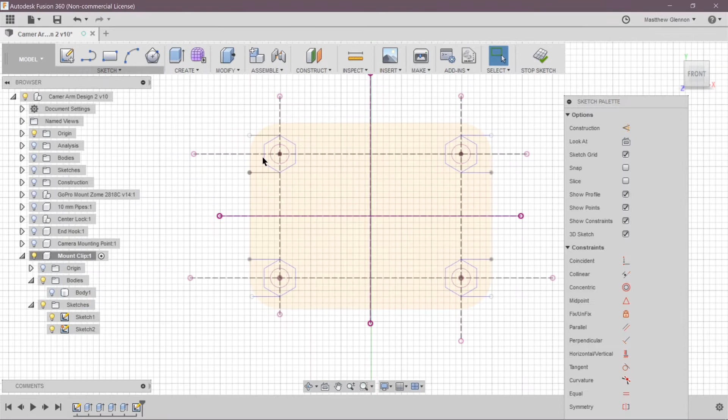Now the next challenge for this project. So far we had the challenge of getting the hook compression thing to work right with the rods. Now the next challenge is designing the hook or clip that will work well with the...

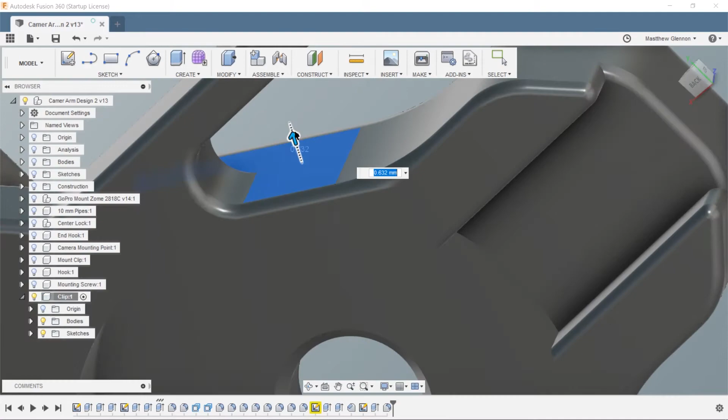So I'm going to make a few tests on the rods themselves, since we've already drilled the holes. By the way, I didn't drill them quite right. I've got a little bend in the rods, so that's part of life, I guess. That's why I'm having a tough time getting the screws on and off for this component.

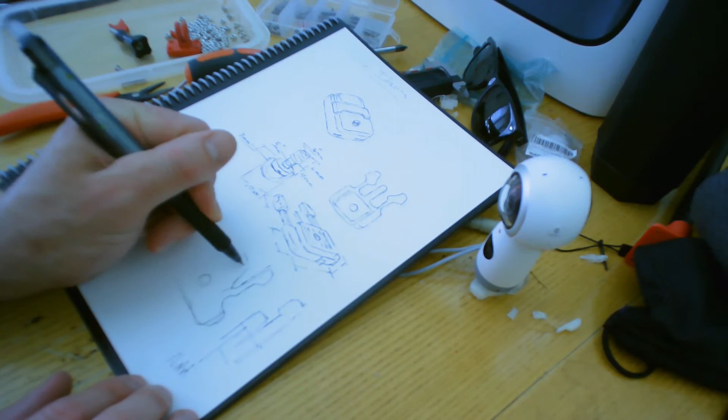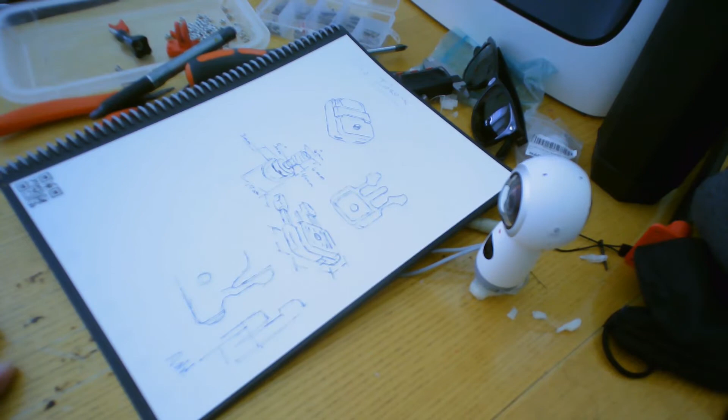Well, back to the drawing board. This kind of failed, and I'm not happy with it. I think if I were to do straight lines like that in the future, I'd have to make quite a few adjustments where the thickness of the walls may need to be thinner or things of that nature.

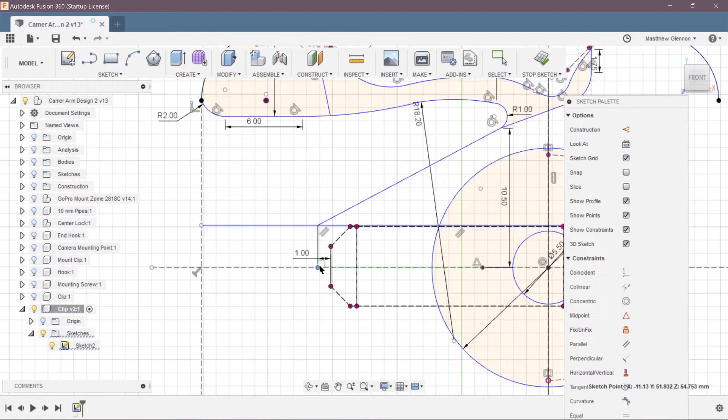I just was not happy with the design overall. I don't feel that it was going to work properly for our needs here. So we're going to redesign everything, and we're going to approach it with this curved design, which I think works better, and I feel it looks better in addition to that, aside all that.

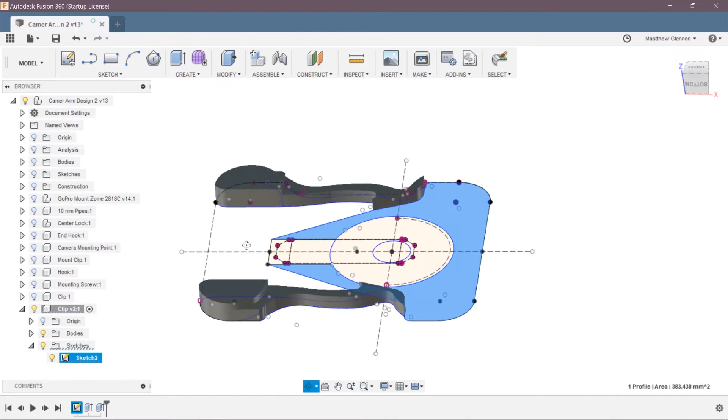There are other problems with the original design. One is the quarter screw hole was too big. Now it's a little bit on the tight side, but it works. At least the screw stays in.

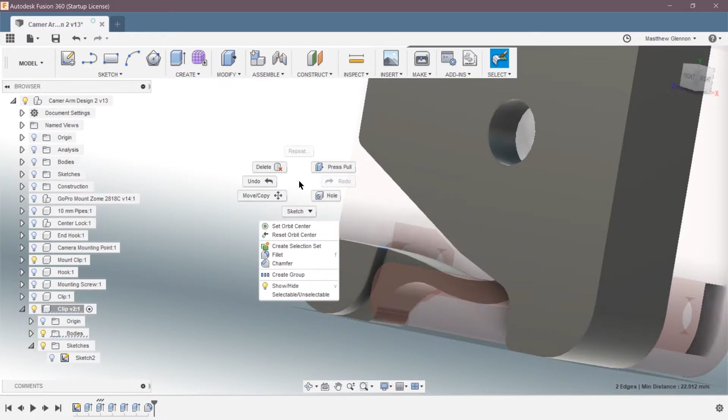The other problem here was the thickness of between the base and the top. There wasn't enough material there. I needed to have over 3 millimeters of material between the base of the screw and the start of the threads to fill in that gap to guarantee the cameras will hold in position.

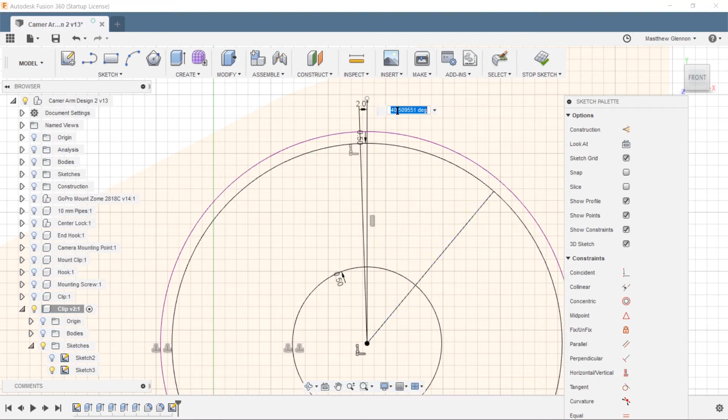You'll see me working on there. In addition, I made a few little bevels on the top going around the hole to help hold the camera in place.

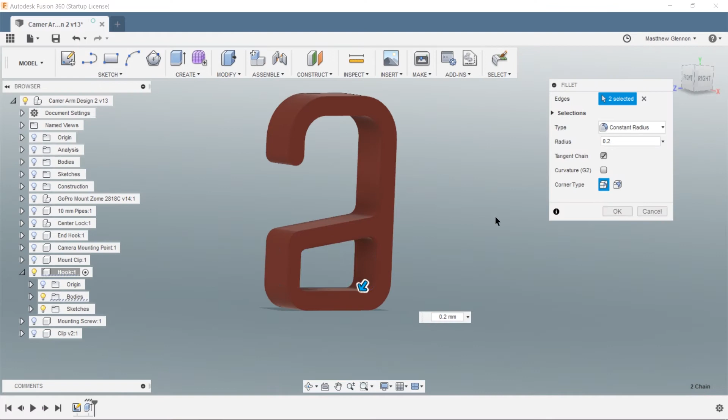Cleaning it out, getting all the bits and pieces, getting all the nuts in, getting everything screwed together, and hoping that this literally will be the final end result of it. Which, by the way, spoiler, it is, which I'm happy about. So as I work on this piece, you can see me testing the new clip out, which looks and works great. So I'm happy with that. And towards the end of this video, I will put some images of the final product and everything completed.

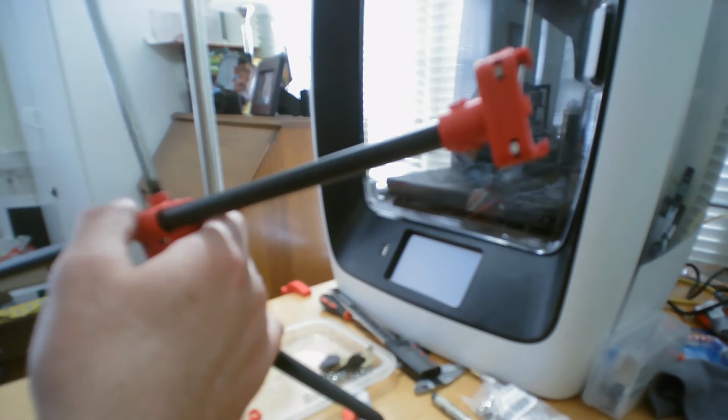Trying it out, seeing how the angle is. Well, this angle I don't think's perfect, but it is far better than what we were doing before, where I had the camera propped up on the edge of a book or a box or something, or whatever I could find to lift the camera up as high as possible. This, at least, it's going directly over me, or over my hands anyways, and there's enough space for me to see, and there's plenty of room for adjustments.

There's a few things I'd like to add maybe in the future, where I can have a little bit of a pivot on the mount, but for now this is good, and I think this will help you guys see a better picture of what I am doing.

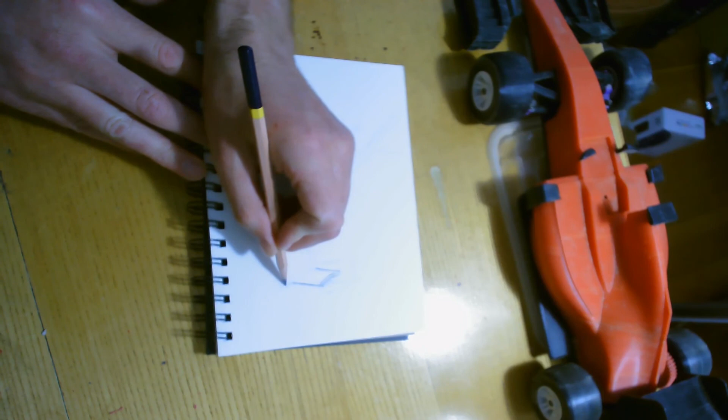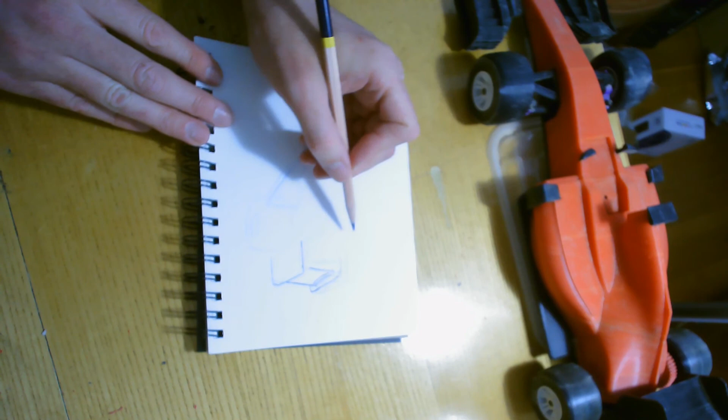Alright, now let's recap on this project. I know for a fact you can find arms for tripods, but most of the time they're for those larger arms, not for something as small as this one. And the way my space is positioned against a wall and stuff, I don't have the space to be able to set up a tripod behind the desk.

So this was actually a good solution for my needs. And I think this is going to work well, so I'm excited to see this. Now, this project completed, that is.

Now, with that said, there are a few things I'd probably change in the future, and there are a few options I will probably look into to alter this project a little bit better. And that will be sometime in the future, way beyond now. I got other projects in mind that are going to be more important than tweaking something that's going to work pretty well for me at this point.

Now, with that said, we're going to take that clip design that I've done. I may have to modify it a little bit, tweak it a little bit to make it a little bit more efficient, or make it a little bit stronger and fit a little better. But that's not that important. What I want to do is take that whole concept and design, and we're going to move it to the open RC car that we've done already.

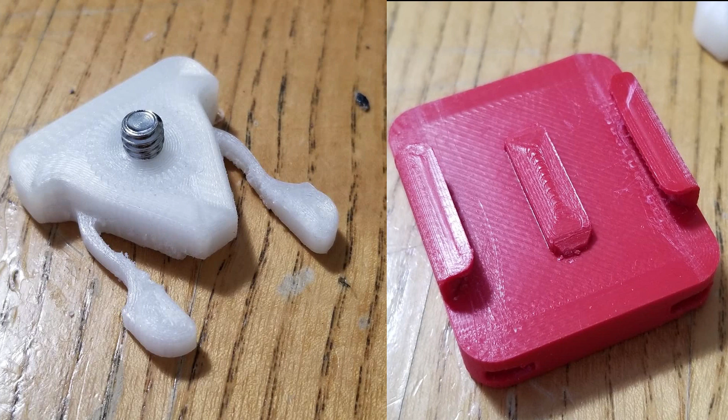What I want to do is the cover to get to the components. I want to make it so I can take that clip on my camera, be able to clip it off fairly easily, swap out to a different camera and things of that nature. So we're going to do that in our next project for the future, so we have ability to actually record the car going from first person point of view.